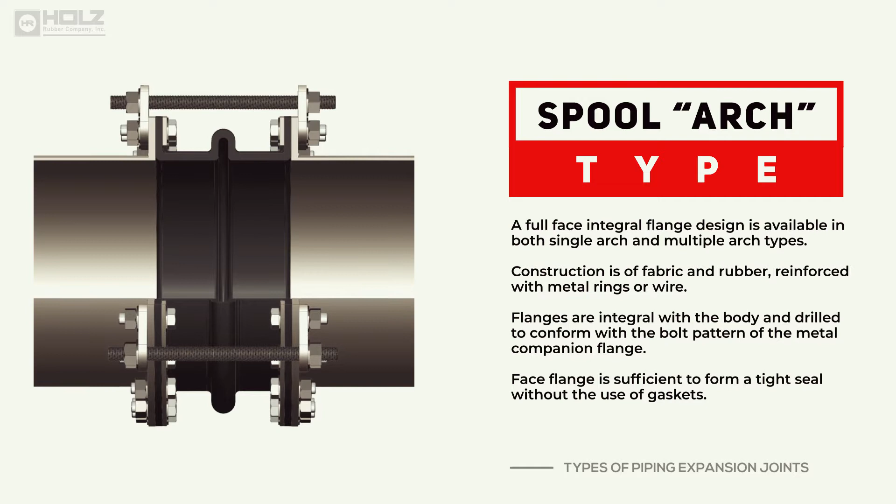This is a single arch spool type joint. It is built with integral flanges and contains rubber, fabric, and metal reinforcement. It is used in applications that require minimal movement and vibration control.

This is a multiple arch style spool joint for applications that require maximum movement and greater overall length. For each additional arch, the movement capability of the joint increases.

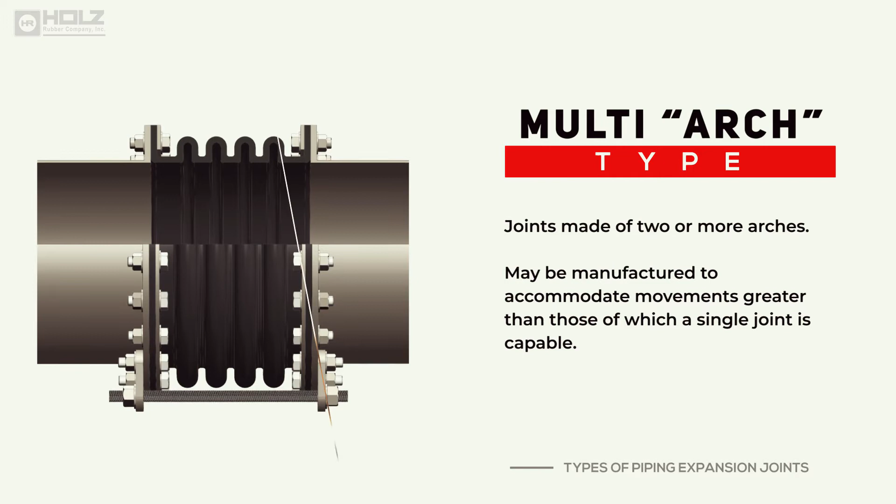Lightweight spool expansion joints are built to work in systems where damage to equipment and flanges may occur if the joint is too rigid. Typically, this style is used on flanges that are made of fiberglass reinforced plastic or other lightweight flange materials.

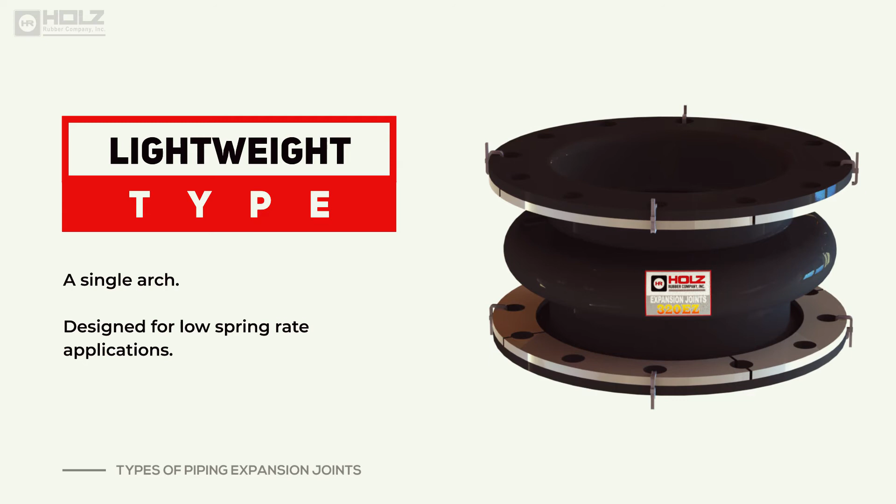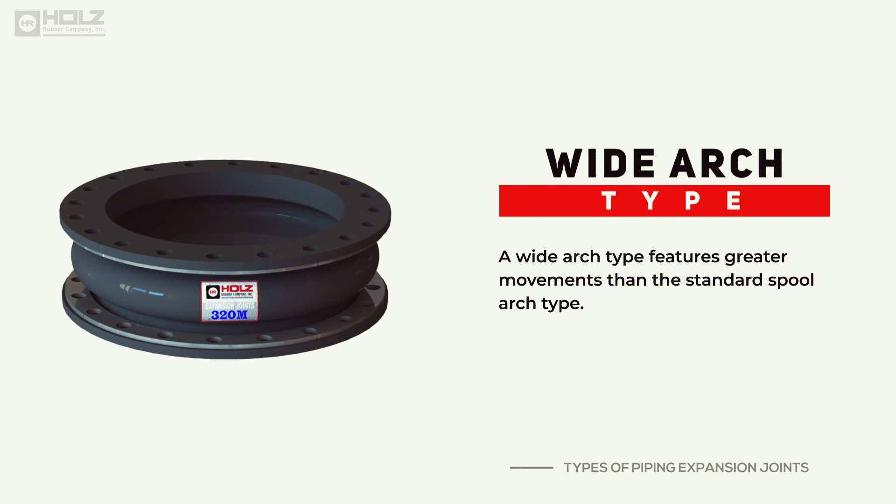Wide arch spool joints are built with a large open arch that extends almost the entire width of the expansion joint. This style is used in applications where there is limited space but a need for a joint that can withstand greater movement than a standard narrow arch.

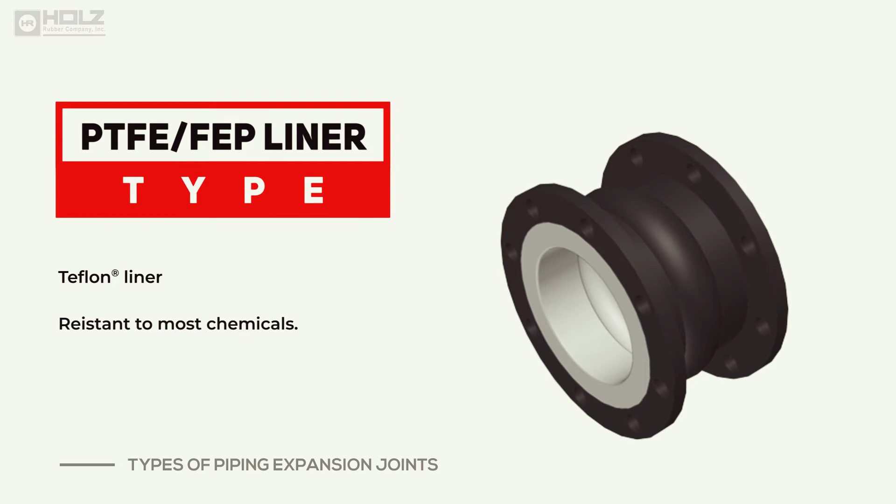Both molded and custom spool joints can be built with a PTFE or FEP liner to improve their resistance to harsh chemicals. This liner is embedded in the tube or inside of the expansion joint, and the elastomer and reinforcements are built around it. For severe corrosive environments, a 100% PTFE molded expansion joint with ductile iron flanges can be used. These are available in multiple arch configurations and come with built-in control rods to prevent overextension.

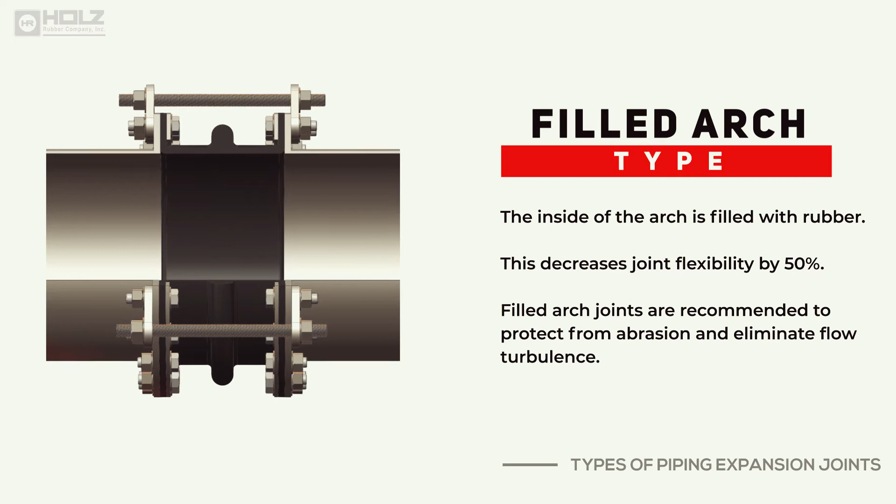A filled arch joint is used in applications where abrasive media or turbulence could cause the expansion joint to wear prematurely. The filled arch is made from the same elastomer as the joint but does not contain reinforcement. This detail allows the expansion joint to perform as required, but the overall movement capability of the joint will be reduced by 50%.

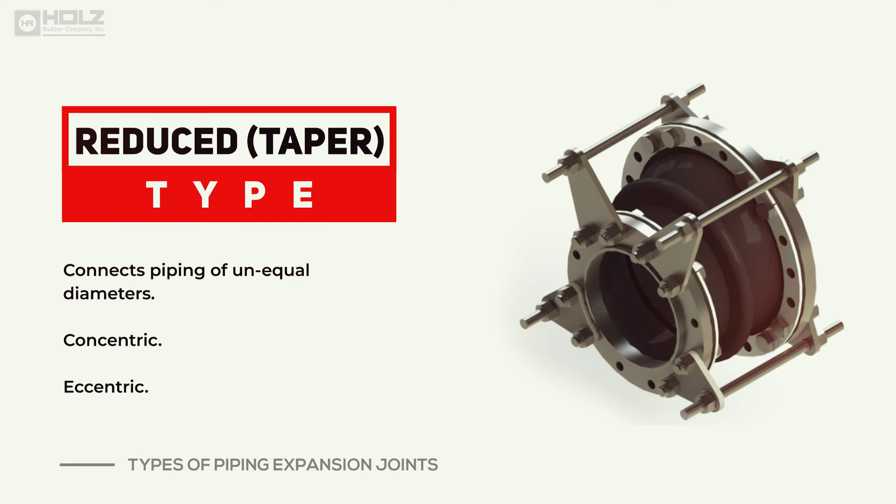Tapered spool joints are used where two different flange sizes connect to one expansion joint. These can be used to connect non-standard equipment to standard piping, or when changing from one size pipe to another. Concentric joints have a common axis at the center of the joint, and eccentric tapers have a common axis along the edge of the joint.

Spool joints can also be manufactured with an enlarged end, where one flange size is larger than the other without any taper. This type is typically used when connecting non-standard equipment to standard pipe flanges.

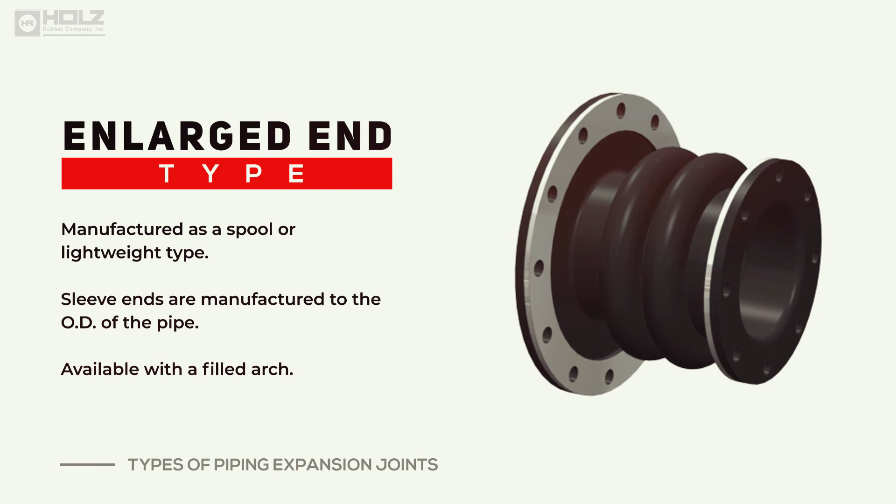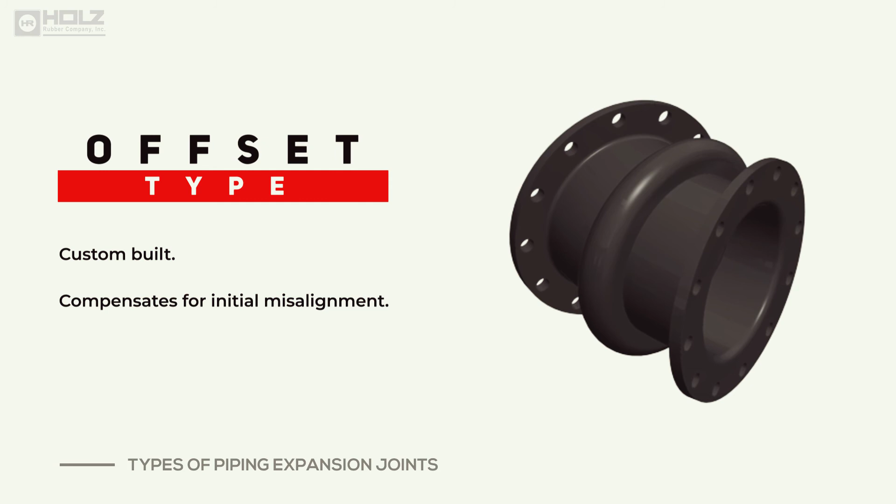As equipment ages, it is subject to settling and can become misaligned. Spool-type expansion joints are a great solution to help make up for this misalignment. Spool joints can be engineered custom with a built-in offset to match the equipment misalignment. This is to reduce the strain that a straight expansion joint may experience.

Sleeved spool joints are banded in place with metal straps instead of flanged connections for installation. Sleeved joints are a good solution for low to medium pressure applications.

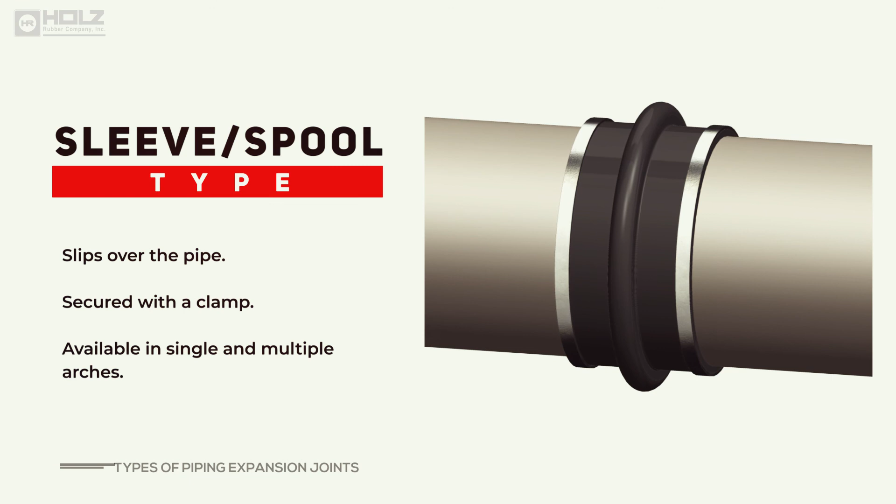Vibration dampeners are designed specifically to reduce vibration and noise in pumps, compressors, and other similar equipment. This style does not have any arches built into the body, but the natural properties of rubber are able to absorb great amounts of vibration.